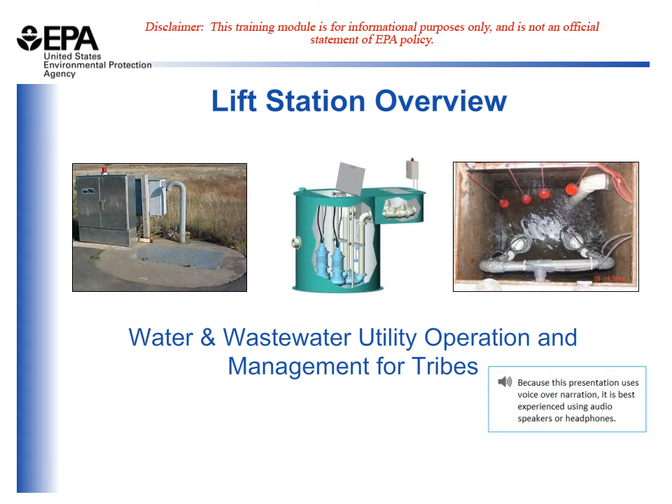So what is a lift station? Well, wastewater lift stations are facilities designed to move wastewater from a lower to higher elevation, generally through pipes. Lift stations are typically located at the low point of a collection system.

So you locate lift stations to collect wastewater in a neighborhood or community, large or small community, condominium or apartment complex, for users to connect all by gravity, where sewage flows through a collection system to that low point. And at that low point, you locate your lift station.

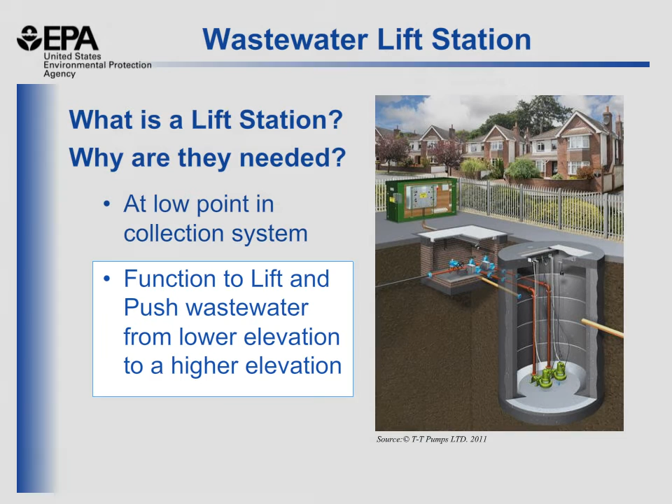The lift station can then pump that wastewater or push it from a lower elevation to a higher elevation, delivering it to a centralized treatment plant.

There are two common types of lift stations that we'll review in this presentation: dry well lift stations and submersible pump lift stations, or wet well lift stations. In a wet well or submersible lift station, pumps, floats, and other parts of the system are located in one vault. In a dry well lift station, there are two vaults used to hold pumps separate from the wastewater.

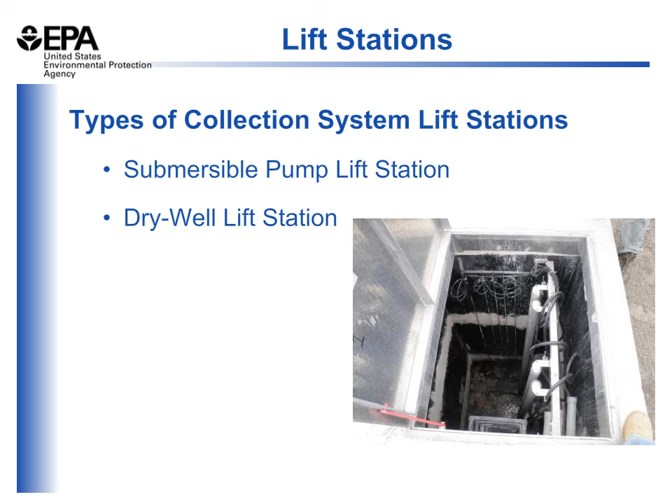This slide shows an example of a submersible pump lift station with just one wet well. Essentially, this piece of equipment includes wet wells, a couple of pumps, valve vaults, control panels, and alarms.

You have submersed or submersible pumps, typically 2, duplex pumps. One would run a lead and a lag. When one runs, the other one rests.

Those pumps lift the wastewater up through the discharge pipes through your valve vault, where you have valves that you can close one pump or open the other, or vice versa, and then pump it out into the collection system or outlet.

Also included as part of this lift station is a control panel and alarm, which are typically located above the ground surface. The system should include an audible and a visual alarm, and allow for shutting off or maintaining pumps and other equipment in your wet well.

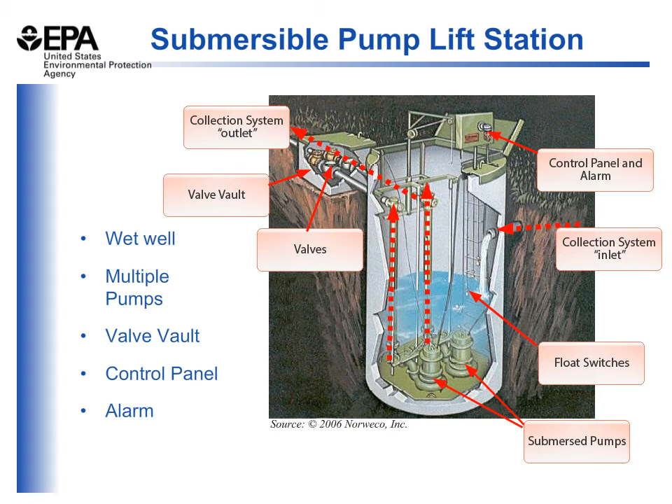There's the working volume, which is between your lower pump off float and your upper pump on float. That's the range in which you want the pump to turn on and turn off.

Then you've got your sump volume, which is below the pump off, because you never want to run the wet well dry. Pumps do not function well when you run them dry. They tend to break down and need major repair if they're run dry on a regular basis.

And then you have your alarm volume, which is above your pump on. If that float fails, then you have a secondary alarm float that comes on, alarms the system, and could have a remote call out. So it's calling an operator, telling them that you have an alarm at a pump station, you have an issue that needs immediate attention.

So the storage vault size is based on expected operational requirements for the lift station: the size of the pumps, the working volume, and emergency storage volume.

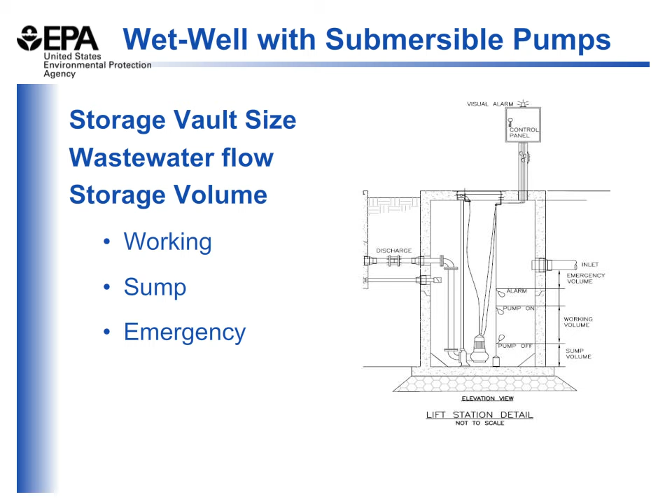Here is a quick example of a way to calculate the storage volume of your wet well. The storage volume is primarily needed to determine how long you have until your volume is overcome if there's a clog or an interruption in your system.

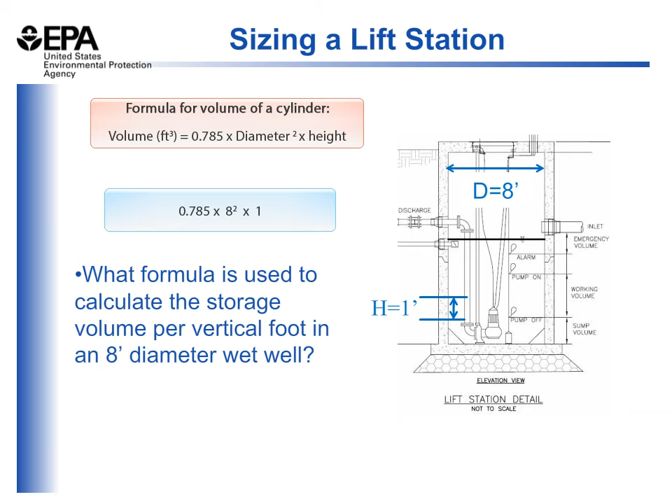What formula is used to calculate the storage volume per vertical foot in an 8-foot diameter wet well? The volume can be calculated using 0.785 multiplied by the diameter squared multiplied by the height. 0.785 is a conversion of pi times the radius squared, typically used by wastewater operators. So if you multiply 0.785 times the diameter of 8 feet squared multiplied by 1 foot of height, you get a per vertical foot volume in the wet well, your answer would be 50.2 cubic feet of volume, or converted into gallons, approximately 375 gallons per vertical foot.

So if you had this per vertical foot volume determined, you could use a stick to measure the depth of liquid in your wet well and measure the total volume in the wet well for any depth. This also will let an operator know how long it takes the wet well to fill up if the pump fails, and based on pump rates and flow rates, determine how long you have until you have to respond to an emergency before the wet well overflows and contaminates the environment or the low spot in the collection system of someone's house or basement.

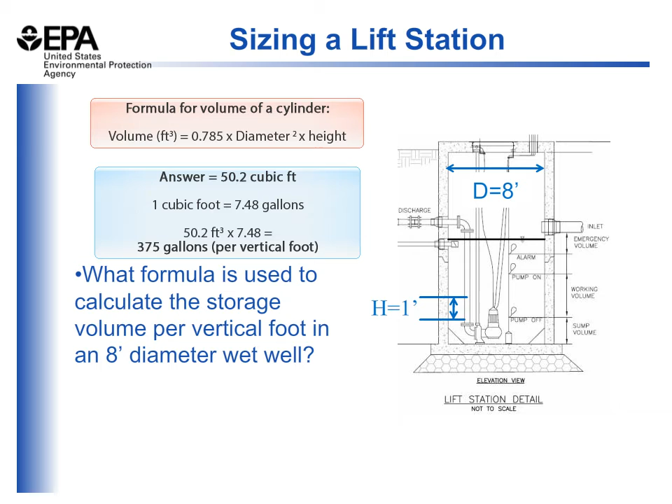The submersible effluent lift pumps have been used more commonly over the last 5 or 10 years, as it's been determined that they generally require less maintenance than the grinder pump.

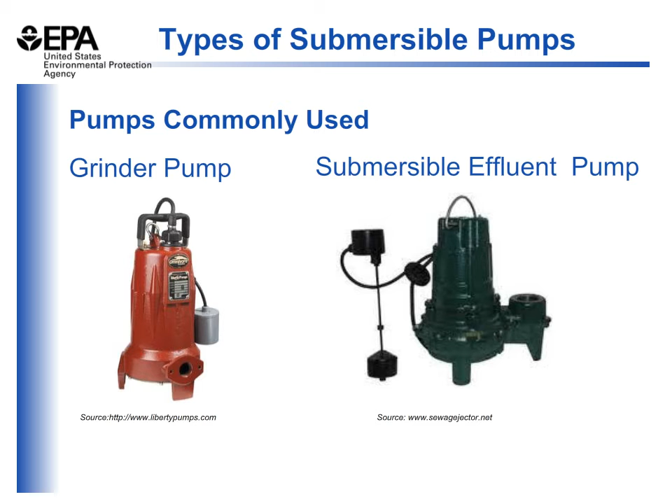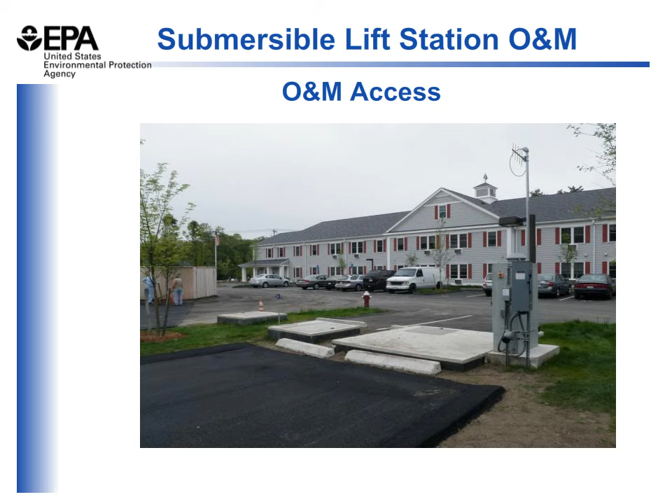This slide shows a typical example of a submersible lift station installed at a residential multi-unit building. You can see on the left the hatch, the access valve vault, accessed through that access door. In the middle are two hatches, both to access the pumps or the wet well. This is a wet well setup with one tank. Below grade it was a long rectangular tank because it couldn't be installed very deep due to shallow depth to groundwater. So as opposed to the example shown in the last slides where it's deeper than wide, this one is wider than its depth. So the operator can access through each hatch, and the control panel is also shown.

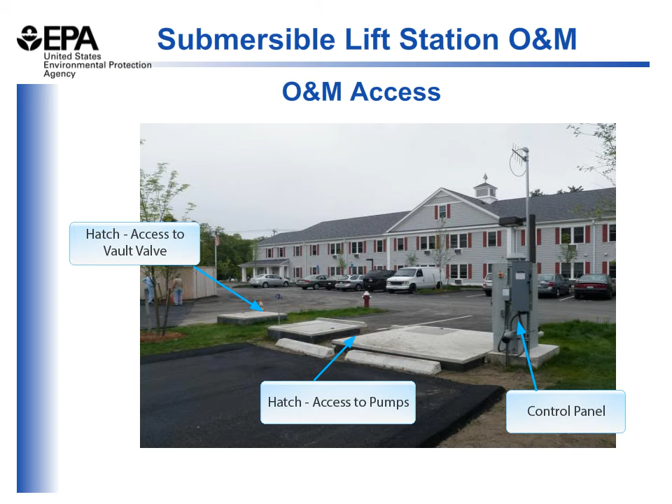You can see the radio antenna, which transfers information back to their SCADA system at their wastewater treatment plant that tells them what type of issue or alarm they may have, and whether it needs to be corrected at the site or from the treatment plant.

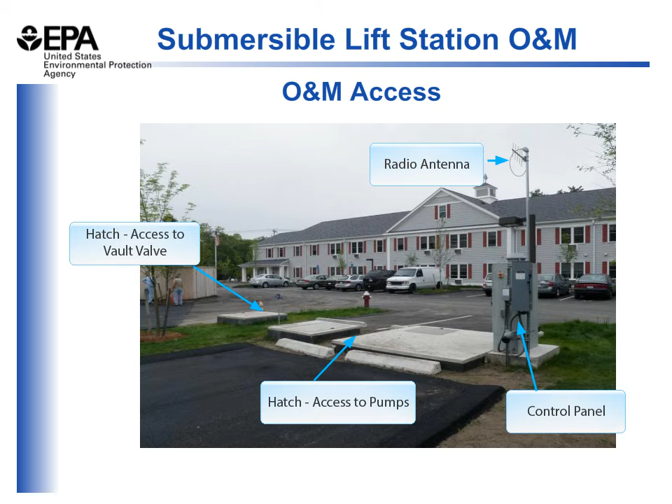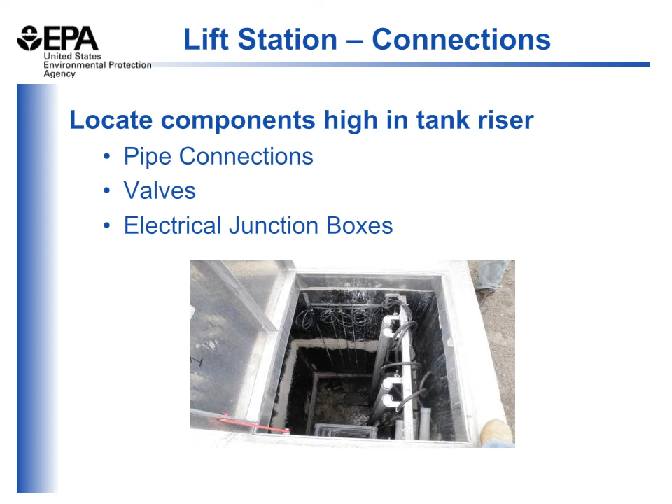On the top end of that lift station, you can see the cables for the floats with extra cable hanging. There are 4 floats in this example. On the right side, there are rails and hoses for the submersible pumps. The pumps can be brought up the rail and thereby maintained by the operator easily without going down into the system. And again, electrical junction boxes should be installed on the high end of the tank so that the operator doesn't have to go into the tank with any regularity.

You should periodically inspect wet wells, checking for oil and grease, debris, and grit deposits on a regular basis. What is a regular basis? Well, it generally is up to the operator to determine that based on the users. Each lift station is going to have a different user or number of users, potentially changing from residential use to commercial and industrial use. The stronger the waste, the greater amount of oil and grease, which is going to require more maintenance more frequently.

When you're doing your maintenance on these lift stations, pumps, and floats, it's very important to keep a record log of every visit, any maintenance activities completed, who was there, the date, how much liquid was pumped, and other details. Why is this important? The record log and data you've recorded will be valuable down the road for yourself to track how this pump station operates, or doesn't operate well and why, as well as for passing that information along to other operators in the future after you've retired.

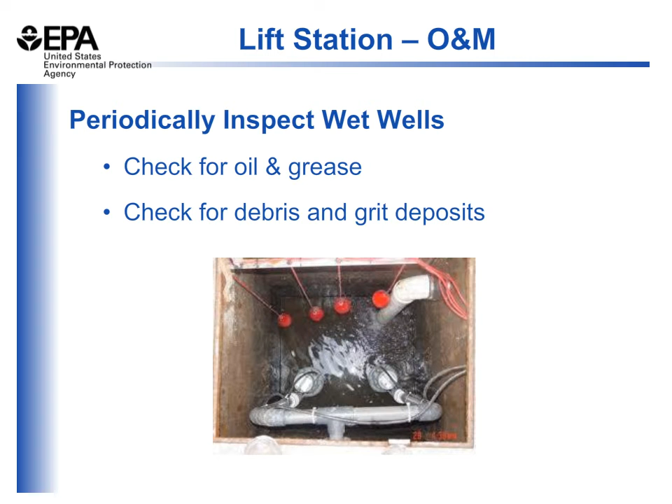Other things to inspect on a routine basis in lift stations include alarms. Test them manually. How would you do that? Well, you could open the control panel and switch the alarm switch from auto to off to manual or hand to see if your pumps would come on or if your alarm would go off.

You could also test the alarms by lifting the high level float. Open the lift station, put in your stick or hook, lift the float up, and your high level alarm should go off. Confirm that both visual and audible alarms work.

This is the same idea for pump operation. If you want to manually operate the pumps, you can do that with the on-off switch, the hand switch, or the manual switch, or you can lift the floats to test the pumps manually. When doing this, review the data from flow meters or measure the pressure in your discharge force main.

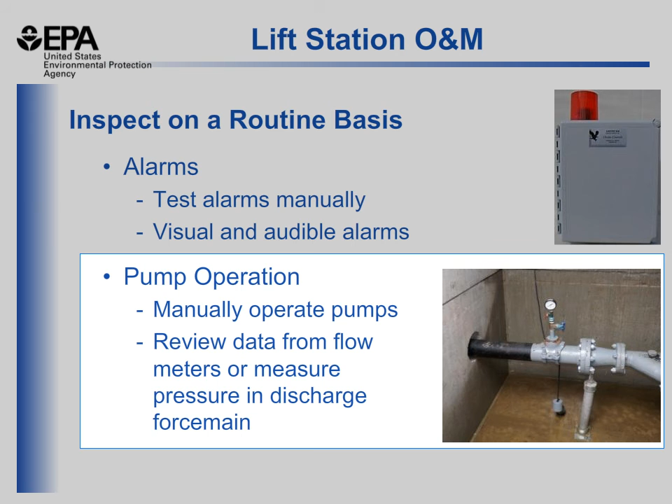Why would this information be important? Well, you'd want to compare it to your historical data to determine if the pump is operating correctly and pumping the volume as it was designed to pump. Over time, pumps will lose some of their efficiency and not pump the same amount of volume. You want to track that on your record logs every time you visit your system to determine when that pump lacks enough efficiency and needs replacement.

Make sure the cables are clear of any obstructions while inspecting your floats. Run a manual test, tip the float up and down, and be aware of corroding or cracking where the cable meets the float. Because the floats tip up and down so often, there's a chance that the cable-to-float connection could corrode or crack, causing operational malfunctions.

Also, record pump run times. Again, longer, less frequent pump times are ideal. You really don't want the pump going on and off every couple of minutes, as that causes a lot of stress on the pump motor. As mentioned before, somewhere between 2 and 10 minute pump run times are ideal.

Measure your pump voltage and amperage. A high or low amperage reading could indicate a problem. What would a high pump amperage reading be indicative of? If you have a high amperage reading, your pump could be working too hard, indicating there might be a downstream clog.

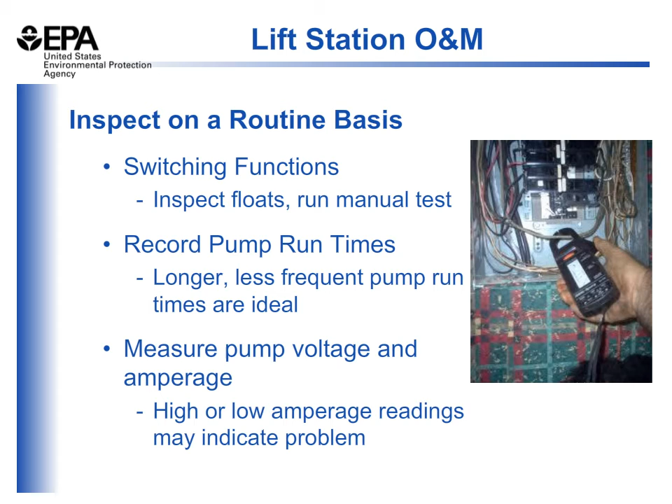They could vary from a small to a large horsepower size pump, starting as small as 2 horsepower in a residential setting for a single home, which has been converted from, say, a septic system, single user, to a collection system by pumping with a grinder pump.

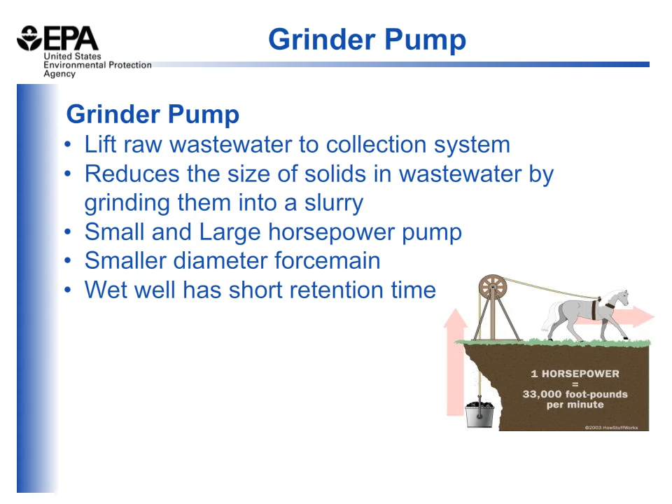Again, your wet well for any pump has a short retention time, typically between 150 and 350 gallons, including emergency volume. So you want to size your wet well and your pump to evacuate that system in a timely fashion so your wet well does not go septic, creating bigger odor and corrosion issues.

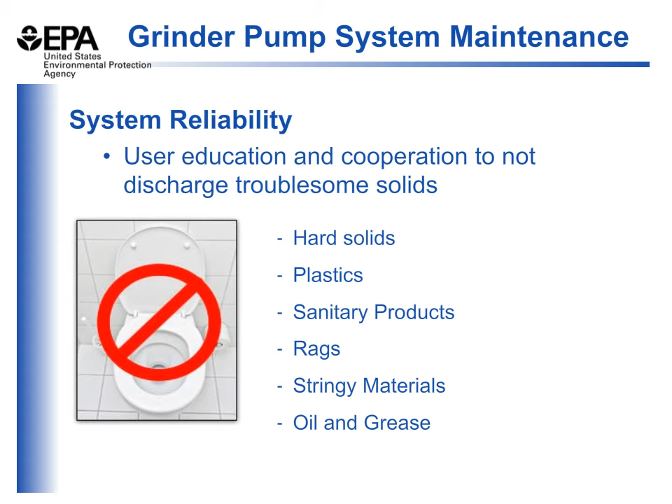In order to assure system reliability, user education and cooperation is a key aspect. Educate your users on what not to send down the drain, as it could cause problems in your collection system, wet wells, lift stations, and pumps. This includes hard solids, plastics, sanitary products, rags, stringy materials, and oil and grease. All of these things can and will clog your system, creating more work for operator staff and ultimately decreasing the life of your products and pumps.

Routine cleaning of the vault includes washing down the grinder pump vaults, then pumping it out with a vacuum truck or pumper truck. The reason to do this is that over time you can accumulate grease or oils that will negatively impact the operation of your float switches and pumps.

After you've washed down your grinder pump vault, cleaned off your floats, pumps, and switches, and refilled the vault, observe pump run times and run them through a full cycle. In a duplex system, confirm that both pumps are turning on and off and alternating. Manually trigger the high water float to confirm that the lag pump will kick on. Take voltage and amperage readings from the pumps to confirm they're operating with correct amperage threshold. A high amperage reading can possibly indicate a clog in the pump and/or downstream in the valve vault.

One method to troubleshoot your system is measuring the scum thickness. You can measure this thickness, clean as needed, and keep track of how often it's cleaned using your record log. This allows you to predict when the next cleaning may be due, because different lift stations have different wastewater constituents and require routine cleaning at different times of year.

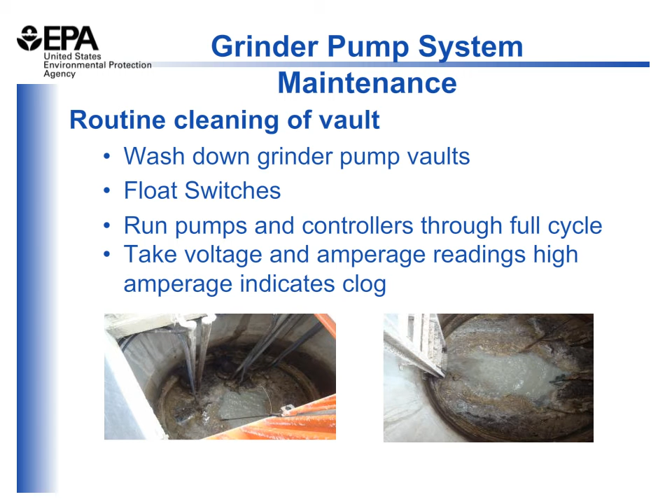You have a collection system coming through the inlet by gravity into your wet well. From the wet well, the pumps draw the effluent into the dry well through the valves into the pumps and discharge it into the collection system. You can open and close the valve before each pump. These are duplex pumps and they run lead-lag, just like the wet well.

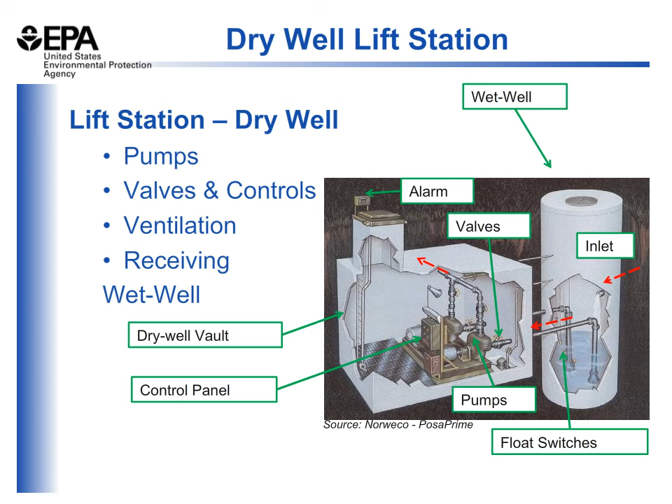This setup allows regular access by the operator. Maintenance is conducted inside the dry well, as opposed to the wet well where pumps are lifted out and maintained. For this reason, the dry well must be adequately ventilated, which is also important for maintaining cool temperatures during pump operation. The dry well needs adequate space for all these components and should have a floor drain or sump pump, because, as we all know, pumps and valves leak occasionally.

The dry well lift station has a wet well sized the same as a standalone wet well, with a working volume, an emergency storage volume, and a sump volume. There are float switches to turn the pump on and off and create alarms as needed. An advantage of the dry well lift station is the operator gets in and out without contact with wastewater, allowing for easy access for routine visual pump inspection. The downside is there are two tanks requiring more space, thereby costing more money.

Over the last 10 years, newer pumps have been constructed to work well submerged in a wet well, and this has become the most typical way to create a pump lift station.

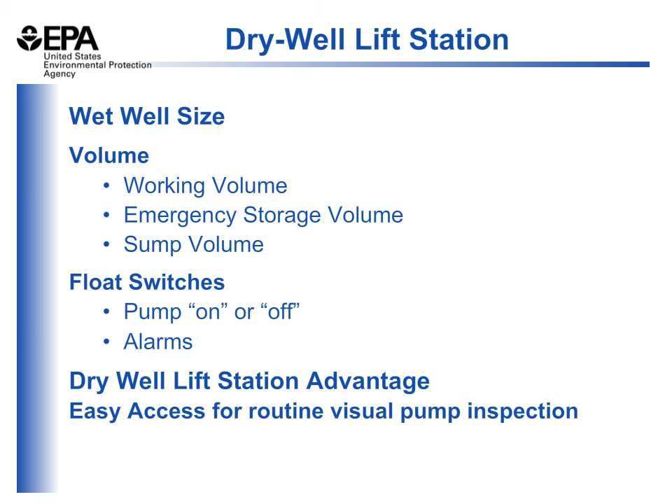Some of these systems can connect to an auto dialer through a PLC system to alert the operator of an alarm, because operators' jobs are typically 24/7, as someone needs to respond to an emergency wastewater situation.

The panel should also include on the front a label with some contact information, and again, the residents or users should be educated as to what these panels are, what they mean when the alarm's going off, and who to call in the case of an emergency.

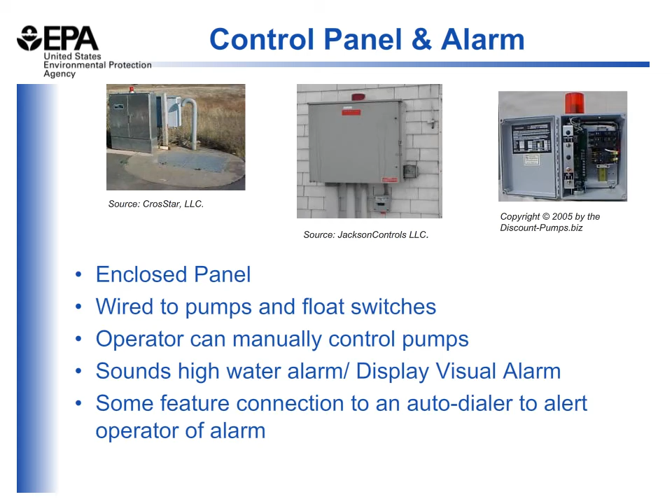You should be able to have a quick response to backups or alarms. 4 to 6 hours typically is the maximum response time, but the response time depends on the emergency storage volume in the wet well. Understanding the operator's knowledge of their system and each wet well, and how much volume it can store before it discharges to the environment or the user's property, is important.

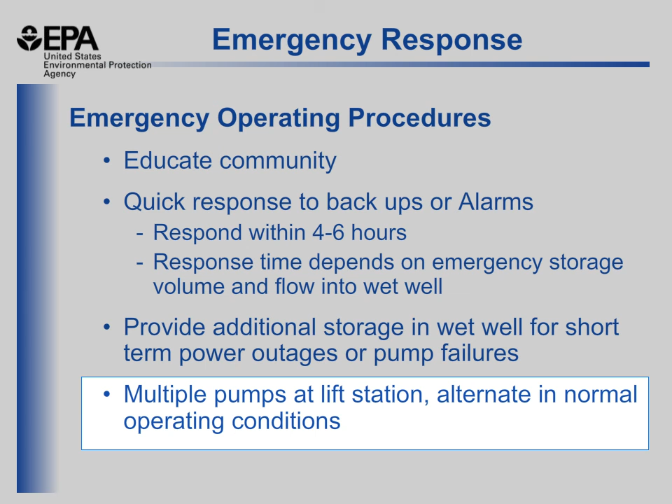As mentioned before, you could provide additional storage in the wet well for short-term power outages or pump failures. You should have multiple pumps at each lift station, alternating in normal operating conditions, and ideally have a spare pump at your shop on the shelf that matches the ones in the wet well, so it can be replaced immediately and you don't leave your wet well running on one pump for any extended period of time.

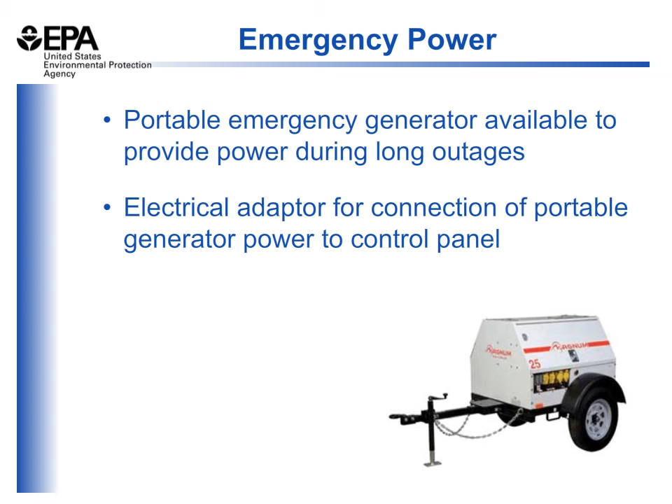In this slide we're looking at emergency power. It can be provided by a portable emergency generator able to provide power during extended power outages. During design or before purchasing this type of emergency generator, confirm that the electrical adapter for connection to the generator to your control panel is compatible. This type of portable generator could be stored at the site or at a main location at the shop so the operator can access it and use it in case of emergency.

Emergency power can also be provided by a generator located on site. Most lift stations should have a generator located on site or some other backup power located nearby. Even though there's an emergency, wastewater doesn't stop flowing, pump systems can be overcome very quickly, and if there isn't sufficient overflow storage, then emergency power should be provided.

An ATS, or auto transfer switch, comes on in general if there's a power surge or lack of power. So not only does the switch turn on the generator if the power goes out, but also if there is a 10% or more drop in power.

These standby emergency generators need to be exercised, at a minimum weekly. At that time, there should be a record log kept of the date, time, and the operator that tested it, as well as the runtime and the results of that runtime. Generator operation and testing can be done by the operator if they feel they have the experience to do so. Otherwise, this work should be subcontracted out to a subcontractor with experience running and operating generators.

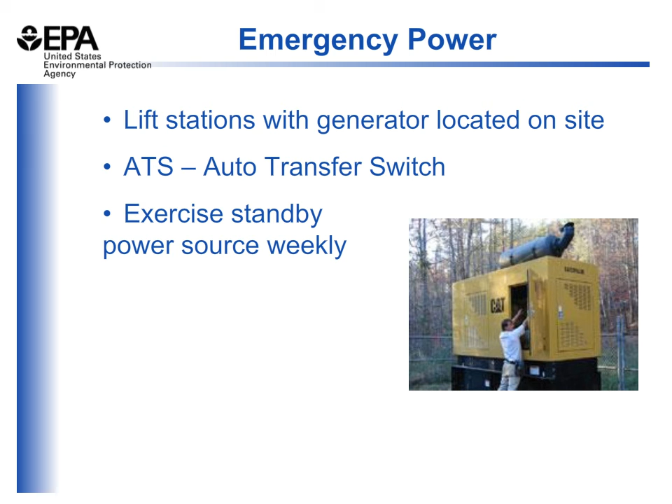In the case of a pump failure where emergency power cannot be accessed immediately, what would you do for next steps? You could call the local septic tank pump truck owner to come down and pump out your wet well. That's not inexpensive, and it can cost hundreds or thousands of dollars depending on the size of your wet well. If you're doing it on a regular basis, it can hurt your overall budget.

Another potential option is a small track-mounted pump. Having that on hand for failures is a capital cost upfront investment, but over time it will pay for itself when responding to these types of events. This is basically a trash pump with a small tank where the hose is dropped into the wet well, and the trash pump pumps the contents of the wet well up out and can be connected to a bypass valve installed downstream of your wet well and discharged into your collection system. This adjustment can be made at any time, and the installation of a bypass valve with this track-mounted system can save the operator money in the long run.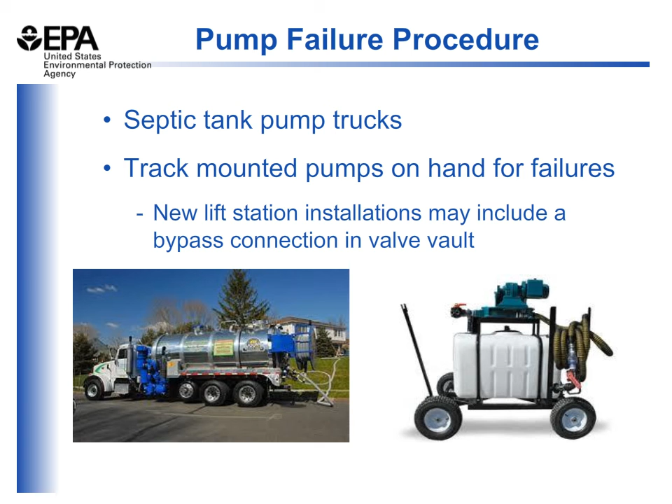Now we'll discuss briefly some safety and potential hazard steps that can be taken. What is confined space, and what areas are classified as confined space? Policies and procedures may vary by agency, and they should be known by all operators, confirmed with management, and followed.

Exposure to gases can be lethal. Wastewater is dangerous. A wastewater system operator has more hazards than a water system operator, and entering confined spaces should be done carefully with proper training, including how to operate a multi-gas meter or a portable gas meter. If you're entering a confined space or opening a hatch and you smell hydrogen sulfide, a rotten egg smell, do not go in without proper training and following these policies and procedures.

Beware of electrical safety and potential hazards with electronics. Be sure to have lockout, tagout procedures in place. If a pump's turned off and you're operating and maintaining a pump or a wet well system, be sure to lock it out, tag it out, and date it prior to doing any maintenance on your pumps or floats in the wet well. Again, wastewater is not clean. Be aware of hygiene, washing your hands, and cleaning up after exposure to wastewater when working on any equipment. Always have appropriate personal protective equipment, gloves, glasses, and other safety devices needed to stay safe.

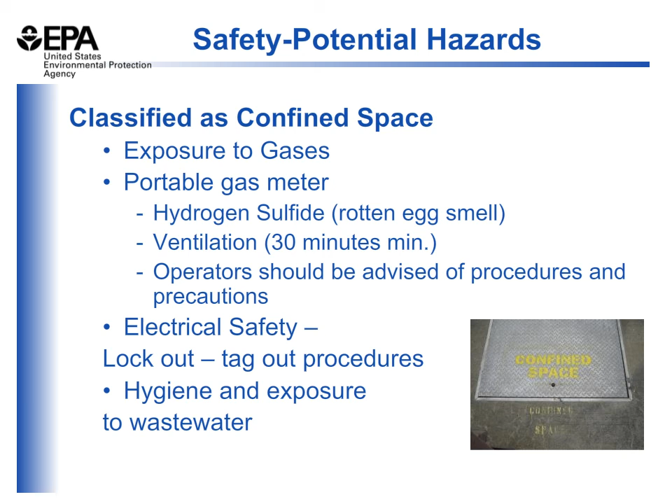With safety and accessing a wet well, a minimum of two trained employees for service calls should be used, and access to a lift for pump service that requires pump removal is necessary. These photos show good examples of maintenance workers with the correct setup and correct personal protective equipment. On the bottom slide, the workers are using a tripod to enter and exit a subsurface confined space, with a tube and a vent for ventilation. So following safety procedures is important.

A question for operators: if your coworker goes down or is injured inside the confined space while you're watching from above, what would you do? The answer everyone should have is don't go in after them. What happens invariably in this case is a tragedy can strike two people instead of one, causing two fatalities instead of one. The person should immediately call for help and wait for that help to arrive before proceeding with any activities down in the hole.

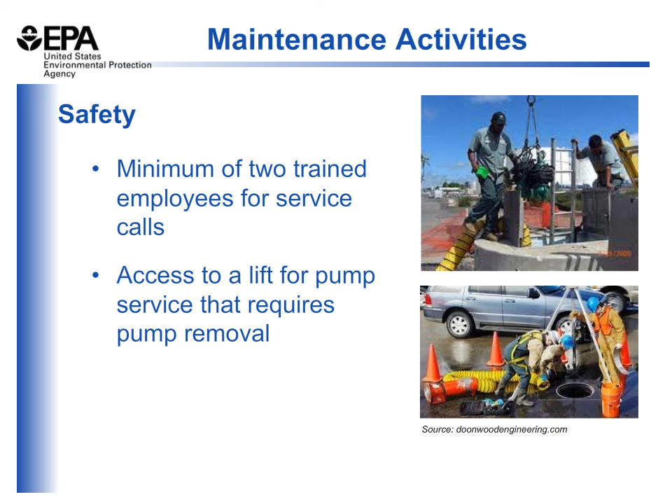Over the next couple of slides, we'll go over some troubleshooting for pumps, potential issues, symptoms, and how to respond to those. If you have pumps in your wet well and they're not operating, the symptom could be a wastewater backup, meaning you've got too much wastewater in your wet well. What would you do first? First, check the power supply. Go to the control panel, open it up, and see if your breakers are on, or if your fuses are good, or if they need to be replaced.

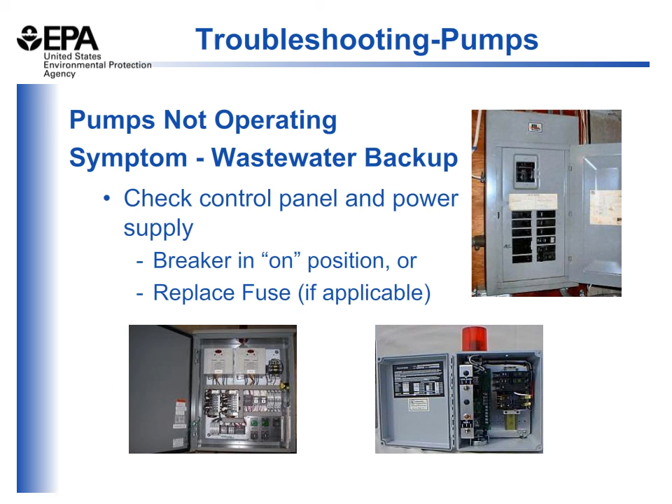If you go to the control panel and your fuses are good and your breakers are on, open up your wet well and take a look inside. Confirm that the high water level exists in the wet well. You've gotten an alarm that says you have a high water level. By checking the power, you know the power's on, and now you've opened the wet well and confirmed that the actual condition exists. If the wet well's full, you could manually trigger the pump to lower the liquid level, or use a portable pump to lower it. Once the water level is lowered, you can inspect the pump. The liquid level should be lowered to a point within the operating levels of the pump. Don't pump the wet well dry. Then you can pull the pump up the rail after you've shut down the power and locked out and tagged out the power at the control panel.

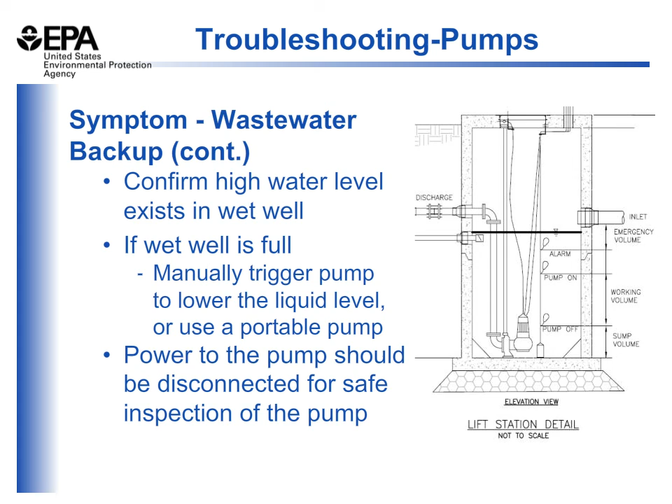So you've confirmed that the high water condition exists, the breakers aren't tripped, and the fuses aren't broken, so you observe that the power supply is on and working. You can do this by checking the amperage drawn by the pump, using a portable electrical amperage meter.

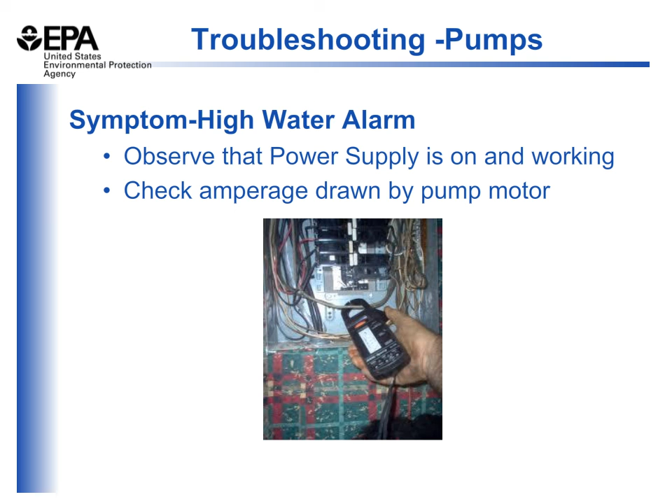In this example of troubleshooting your pumps or wet well system, we have a high level condition, and the symptom is that your pump is running on auto, but the liquid high level remains high. The pump should be discharging wastewater into your collection system, but the pump is running and the liquid level remains high. What procedures or steps would you take to resolve this? There could be a blockage at the pump intake, and the pump motor would continue to run even though there's a blockage. Check your filters and screens to make sure they're not clogged, and pump down the wet well to normal operating levels with the other pump or a portable pump.

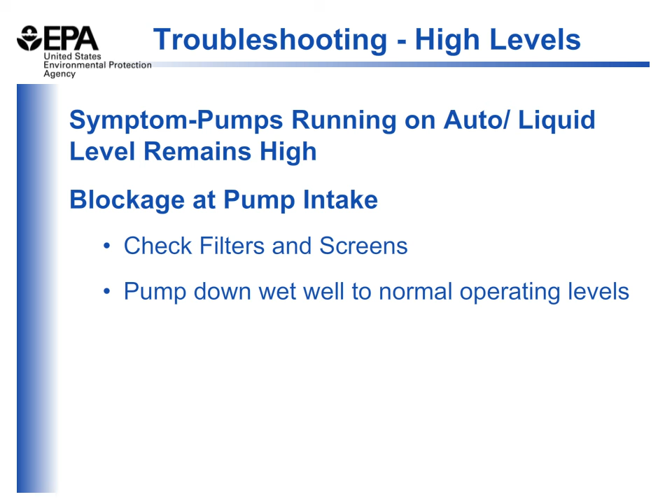There's not a blockage in the valve or it's not partially closed. If you do have a blockage in the discharge, your pump is still running, it's deadheading against the blockage. This is not good for your pump and will reduce the life of the pump ultimately. It could be an old valve that's just not able to open full anymore. Again, if you've got a record of when this valve was installed, possibly the last time it was maintained, you can determine its age and whether the age may be an issue.

Or if you live in a cold weather climate, you could have a frozen pipe that's not allowing your system to discharge. Another potential cause for a high level alarm or continual high level alarms in a wet well could be infiltration into that wet well. It's possible that your wet well is cracked, you have a high groundwater condition, you have infiltration into that wet well through a crack or through a seal.

It could also be the case that your check valve is broken. If your pump is pumping wastewater out of the wet well into your collection system and your check valve is broken, when that pump shuts off, that wastewater could run right back down by gravity through your check valve and into your wet well again.

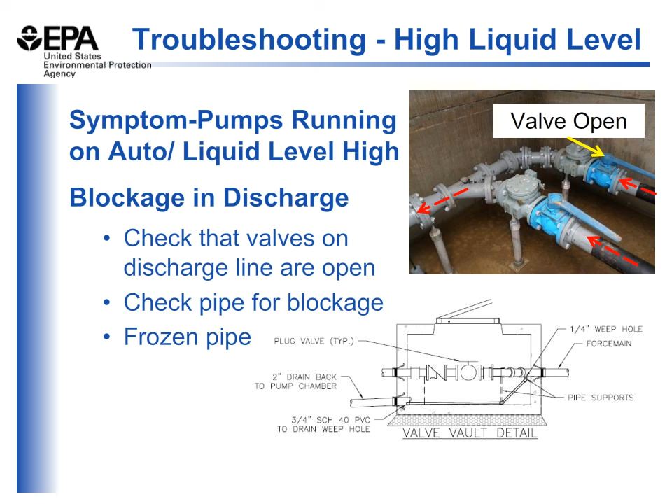Another example of how to troubleshoot a wet well: if you have the case of a low level in your wet well and your pumps are running on auto without shutting off, what could be the potential issue here? Well, you can check the position of the wet well controls, meaning the floats. If the float's gotten stuck or tangled somehow in an on position, causing the pumps to keep running even though the level in the wet well is low enough that they shouldn't be.

If that's not the case, then a pump starter contactor could be stuck closed, making the pump run constantly. In order to make that repair, if you as an operator feel capable and comfortable doing so, turn that main power off, following all lockout and tagout procedures. Determine if that motor starter relay is operating properly.

Contactor could also be closed due to corrosion, moisture, or insects if the pump is old and hasn't been maintained properly. And then if you find that it is the case that that relay is broken, replace that relay yourself if necessary, or send the pump out to the manufacturer for maintenance.

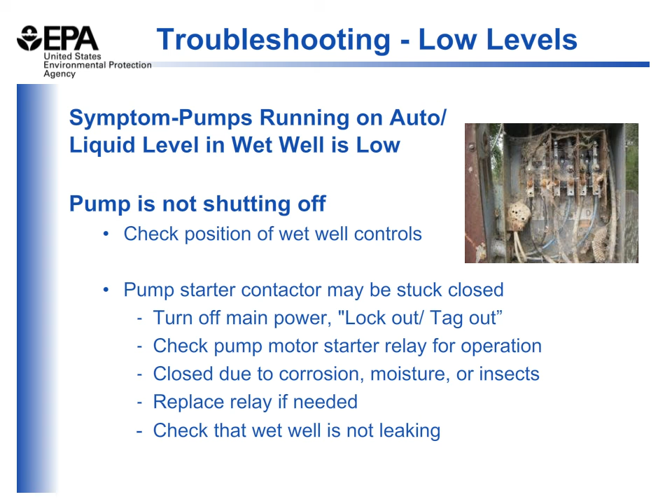Another potential issue with wet well systems and check valves and troubleshooting those: is it the case that your pumps are running frequently, and what might potentially cause that? Well, are the check valves on the discharge force main seated correctly? Are these valves aging and unable to be closed or opened all the way? Make sure that the check valves close when the pressure drops such that they don't allow the wastewater to flow back into the wet well.

If these check valves don't close, the wastewater that's pumped out of the wet well through the valve vault into the force main is going to come back through the force main by gravity into the wet well because it's the low point of the system.

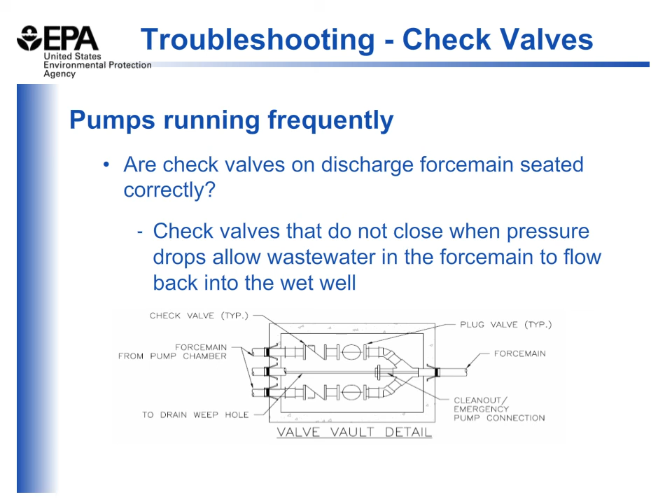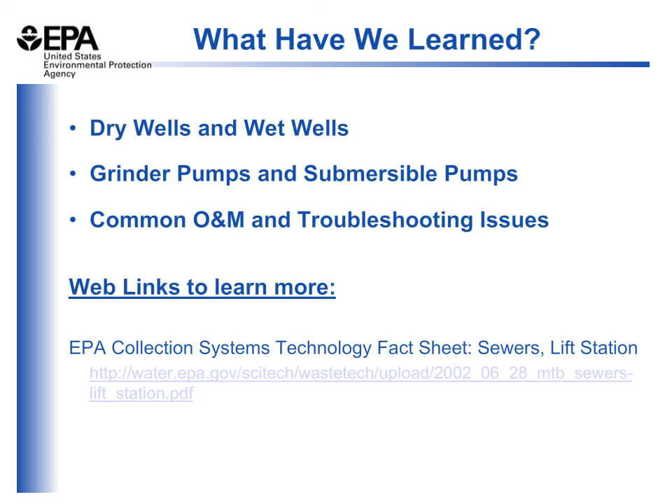This concludes our presentation on wastewater lift stations. We've discussed the types of lift stations, both submersible and dry well lift stations, common components of lift stations, including grinder pumps, submersible pumps, and some of the common operation and maintenance practices. We've also reviewed a few ways to potentially troubleshoot problems with lift stations that you may experience as an operator on a daily basis. Thank you for participating in this presentation, and I encourage you, if interested, to investigate some of the other water and wastewater system operation and maintenance presentations that are part of this training series.